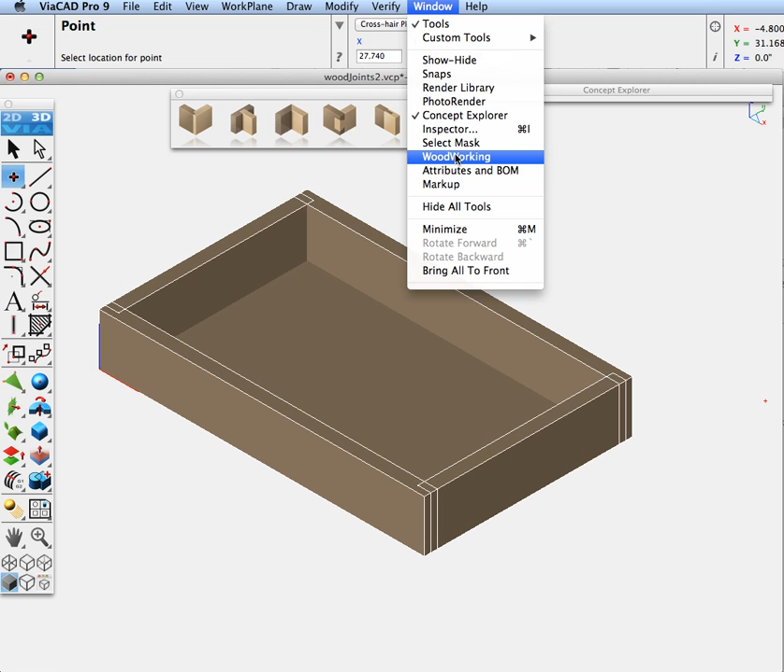The woodworking tools are located under the Window Woodworking tool palette. I've actually gone ahead and created a custom tool palette and dropped the icons to get the 64 by 64-bit larger icons on the screen.

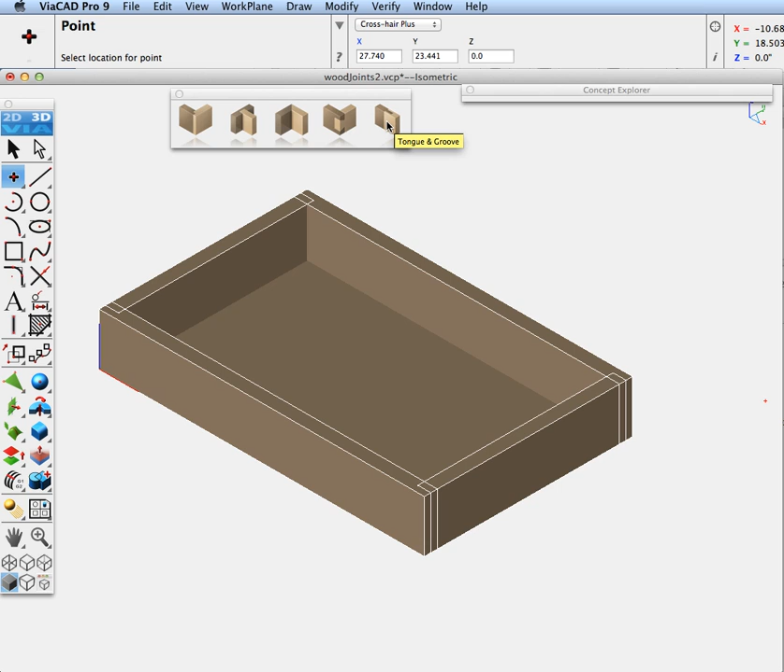The 5 new joints added are Rabbet, Dado, Miter, Dovetail, and a tongue and groove joint. We're going to go ahead and demonstrate each one of these joints.

Let's start off with the Rabbet joint. We have a drawer here on our screen that we're going to cut a couple of joints into, to fit the back piece of the drawer onto the sides. Let's go ahead and hide the bottom, and let's go ahead and hide the front and back of the drawer.

Now let's go ahead and create our Rabbet joint. These are 1 inch thick, so I am going to have the depth of the joint be 1/2 inch and the width be 1 inch.

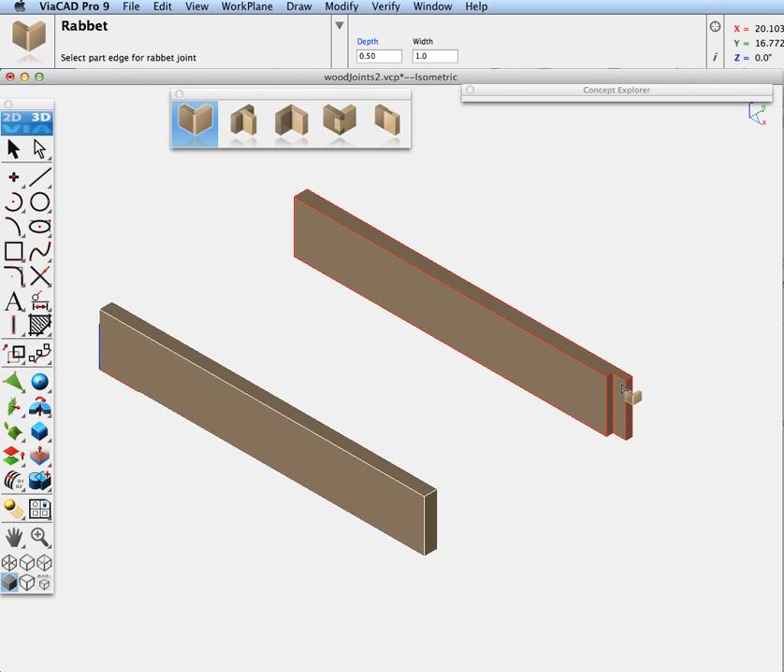I'm going to go ahead and pick the edge that I want the joint to be parallel to, and then I want to pick the face that it lies upon. Let's go ahead and pick the back. Same thing, and then let's pick the other side. Pick the edge and the face. Edge, face. And that's it for our Rabbet joint.

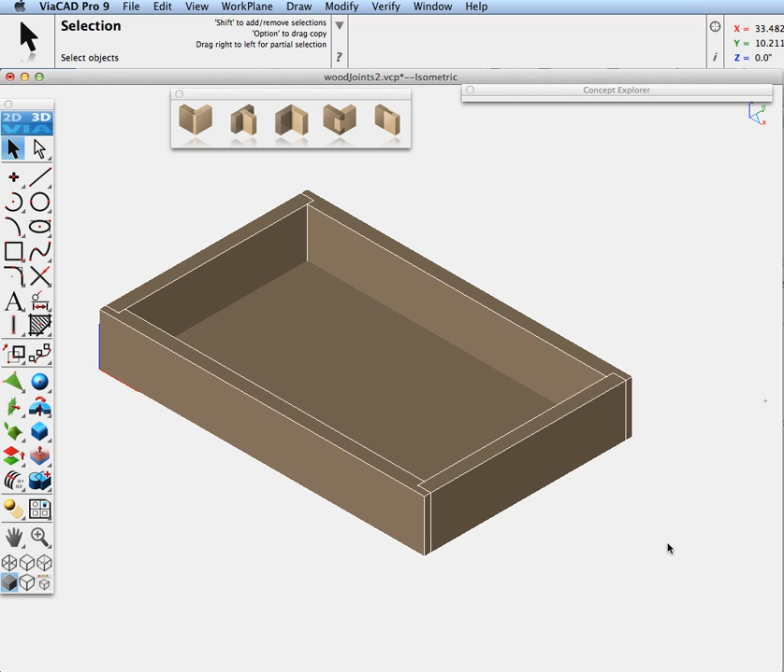Let's go ahead and turn on our two front and backs and see how they fit in there now. Let's do one more thing - let's go ahead and do the bottom.

Let's hide the bottom first of all, and I'm going to rotate it. And let's go ahead and put a Rabbet joint all along the bottom so that plate, the box in the bottom, can fit on it.

And this time, let's see the depth - I have that as a 1/4 inch width bottom, so let's go 0.25. And the sides are 1 inch, so let's have it go halfway through, so let's go 0.5.

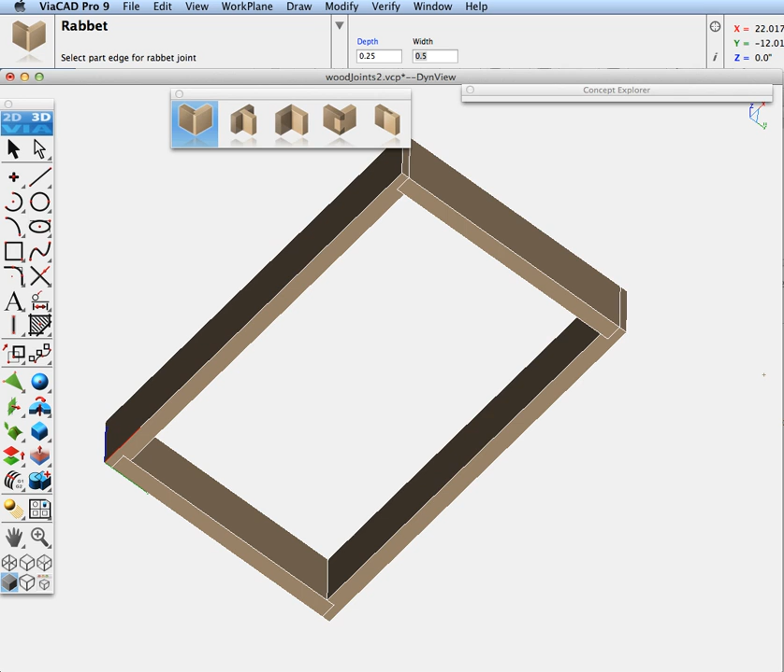Now I'm going to zoom up, and again we'll pick the edge and then pick the face. Edge, face, and then let's zoom down to the bottom, get the other two. Edge, face, edge, face.

Now let's go ahead and turn on the bottom. And so there we have our quick drawer using Rabbet joints.

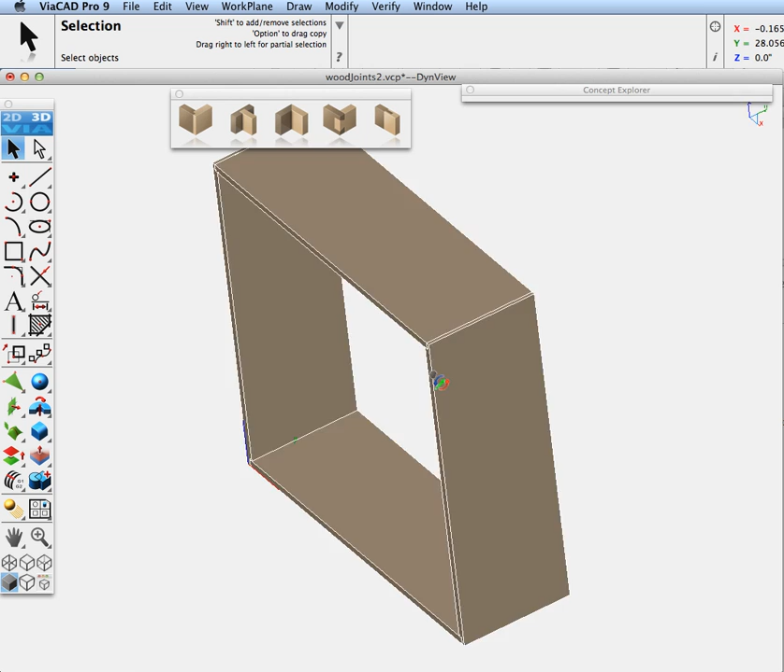Next I'm going to go to Concept Explorer, and I'm going to turn on another model, and this time demonstrate Dado joints. I'm just going to go ahead and isolate my layer, and let's do a zoom extents. What we're going to do is add 2 shelves to this bookcase, and we're going to add those shelves to the bookcase using Dado joints.

Alright, let's turn off the top and turn off the bottom. We have a couple Rabbet joints already on this, so we're going to go to the Dado joint, and we're going to create a through Dado, where this is going to run the whole length of the part. I can also do stopped, blind, and custom Dado joints. Custom is if you want to select a line and have it go at an angle across your wood.

Alright, so let's go ahead and specify the distance from the edge, and I'm going to go 7 inches. And the depth, we're going to go 0.5 inches, that's for 1 inch thick wood. And let's put the width at 1.

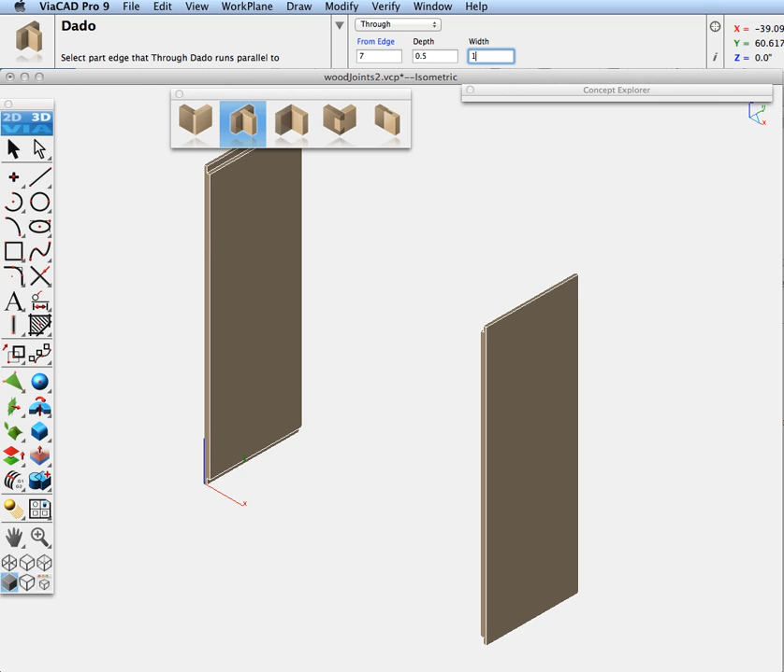Then I'm going to zoom up over here, and I'm going to pick this edge. So we're going to go 7 inches up from this edge, along this face.

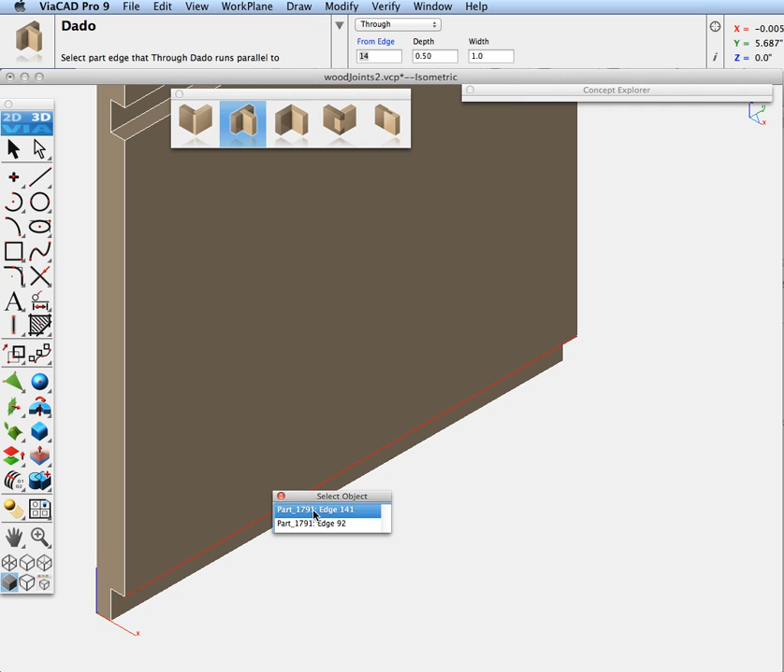Now let's do this again, only this time let's do 14 inches. We'll pick this edge, pick this face, and then we have our 2 Dado joints on that side.

You know what, we've got to do this side as well. So let's pick edge, face - that's 14 inches. Click on this, turn this back to 7, pick the edge, pick the face, and there we have our 2.

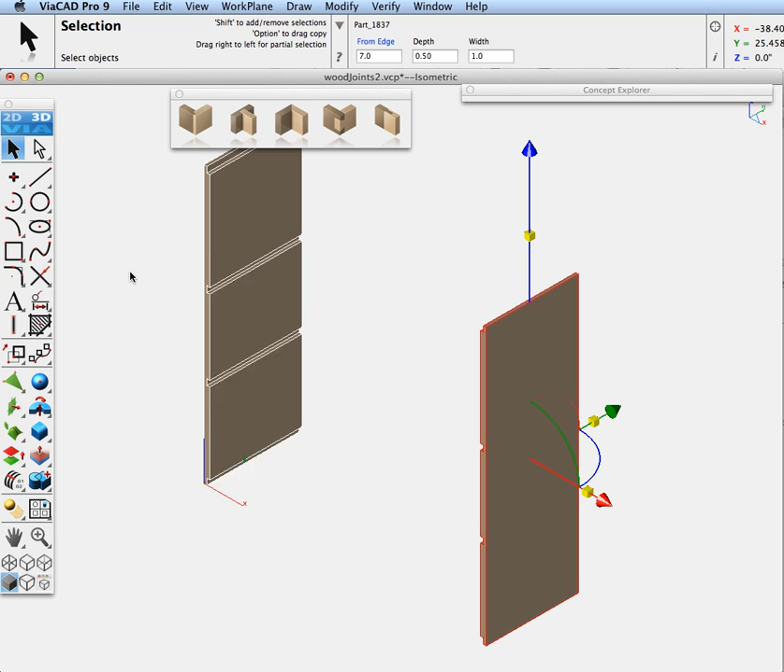Now let's go ahead and turn everything on. I'm going to grab this, and grab that endpoint, hold down my Option key, and let's drag one in over here, hold down the Option key, pull it up, and put it in over there. And there's our real quick bookcase using Dado joints.

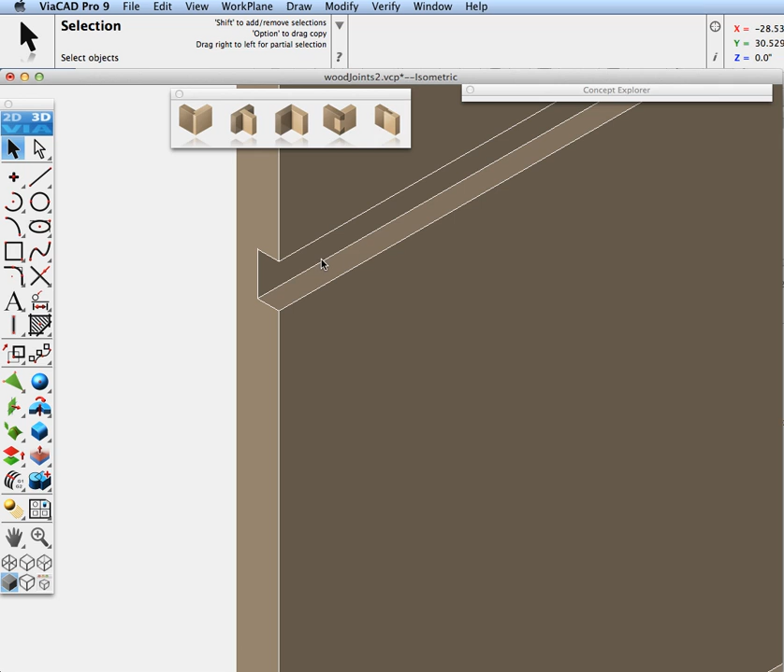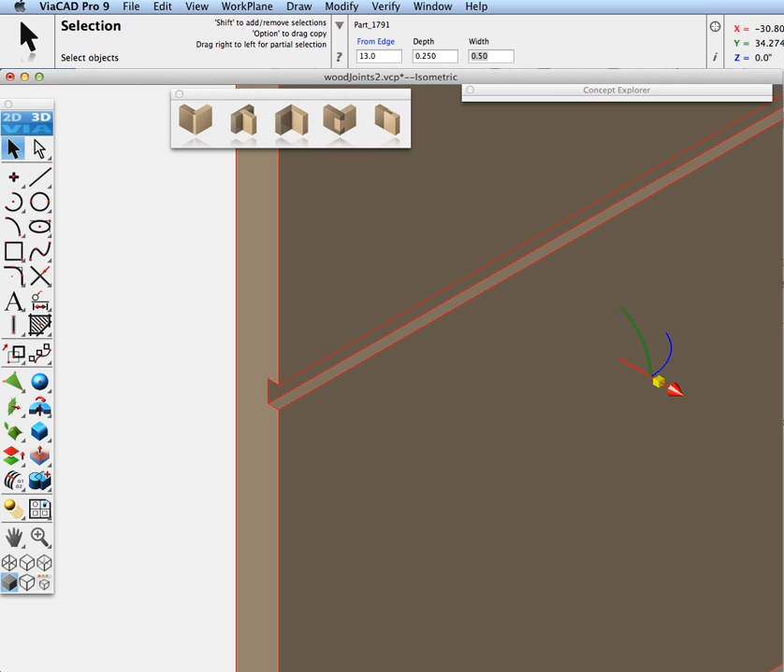Like the mechanical design features, you can also take the wood features and click on a face that was created by the feature, and the data entry window will show you the parameters for it. So let's say I didn't want it at 14 inches, I wanted it at 13 inches. I can type that in, or change the depth to 0.25 or the width to half an inch. After you create your woodworking joint, you can go back, select it, and modify it.

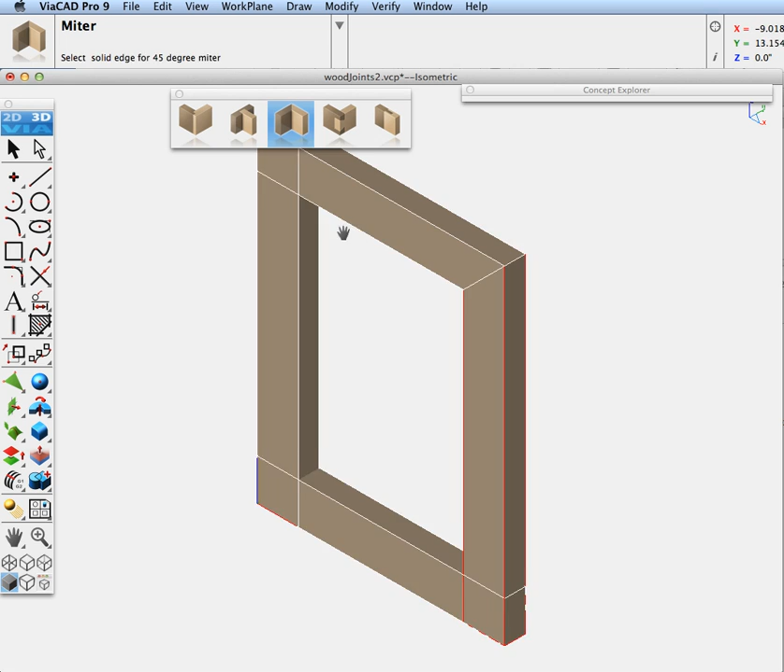The next one we're going to talk about is the miter. Let's go to our layer manager and isolate that layer. Say you have a picture frame and you want to create 45-degree joints on it. So we'll pick this edge, and you can see how that created a 45-degree angle. Then to mate it, we'll put another one on this side, and we'll just run around on those edges to do all of them. And that is our miter joint.

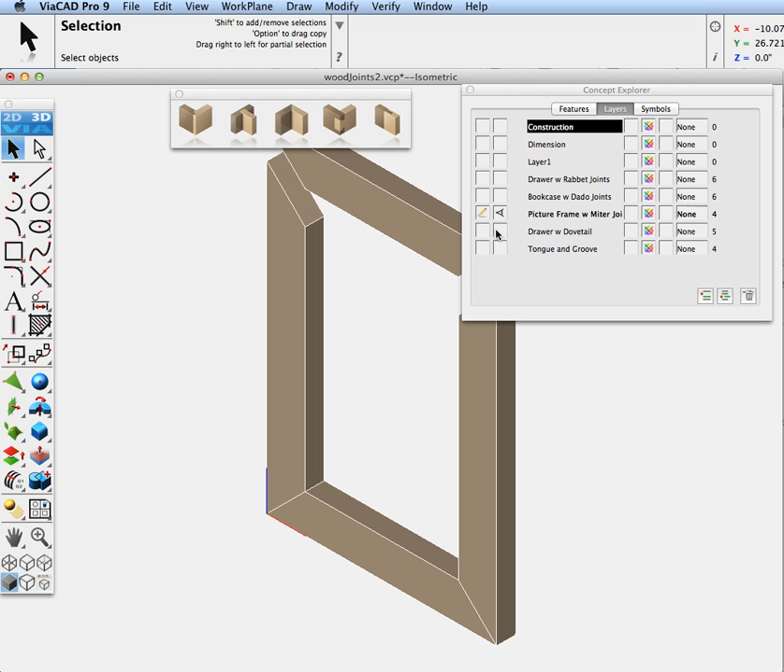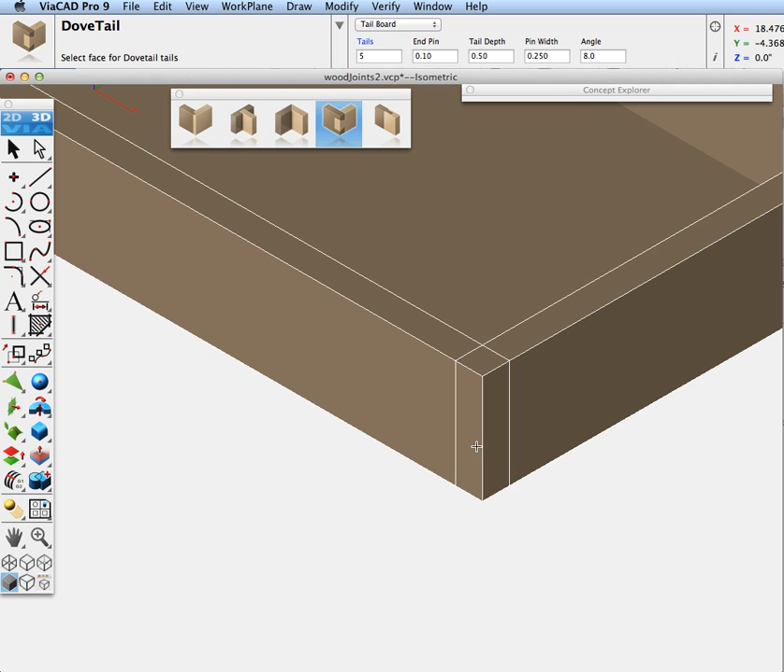Go to Concept Explorer. This time we're going to do a dovetail. Isolate our drawer. With the dovetail, you're going to have a tail board and a pin board, so let's specify our parameters for it. We'll select the face, the end of the piece of stock of wood that we're going to have our tail board on. Let's grab that, pick that face, and apply everything to it. Let's go ahead and make the end pin a quarter inch, a little bit wider.

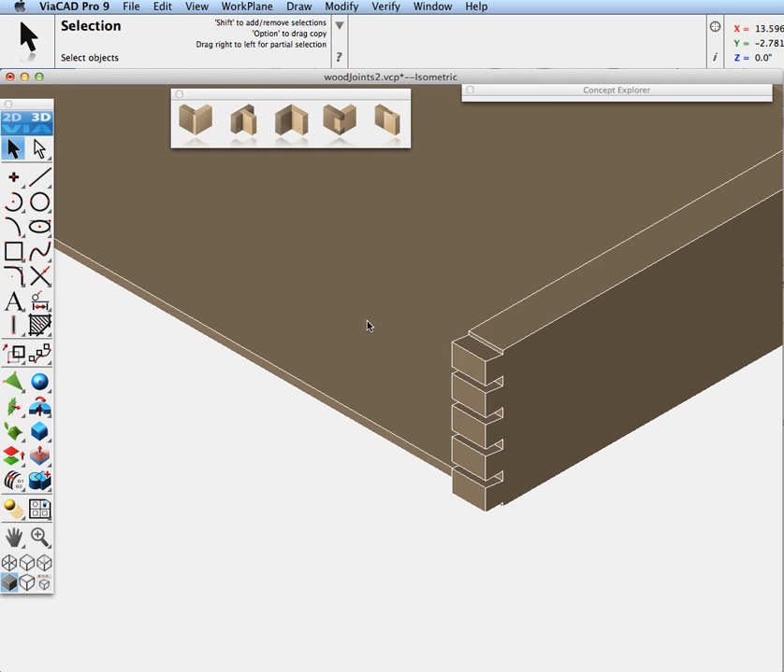Let's turn this off so you can see these a little bit better. Let's do some modifications to it. Change the end pin to 25. There we go. Let's change the angle to 10 degrees.

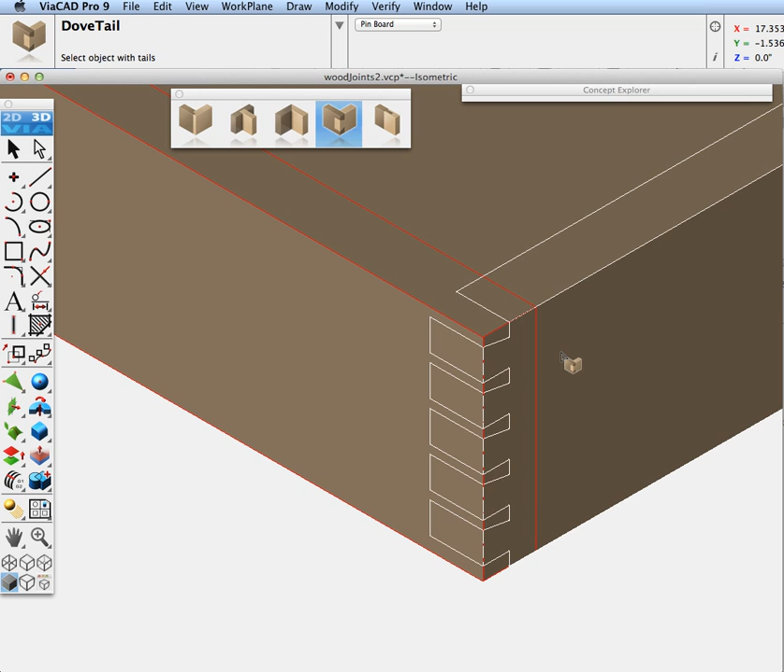Now let's say we get our dovetail parameters where we want them. Let's turn back on this, and make the mating pin board for our dovetail. We'll pick the part that we want to have the pins on, and then pick the tail board. And now you can see we've created our joint in there.

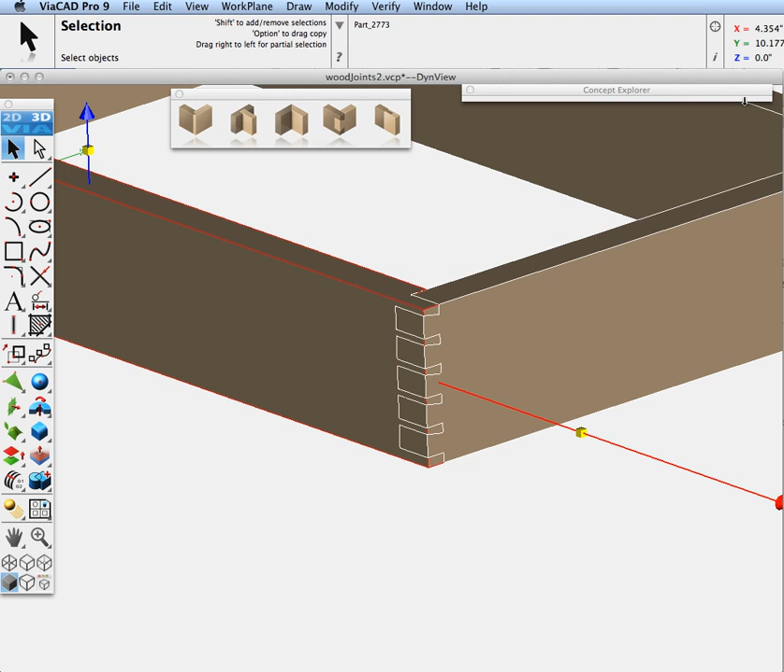Let's pull it out. Let's turn this off so you can see a little better. I can't see my gripper, so I'm going to turn that on and make it always visible. There we go. Let's pull this out. Now you can see our joint.

Let's say we decide to change one of the parameters. Let's click on it and change the number of dovetails to 4, and change the tail pin width to 0.05. So there you can see you can modify both the tails and the pins, and they update with your parameter changes.

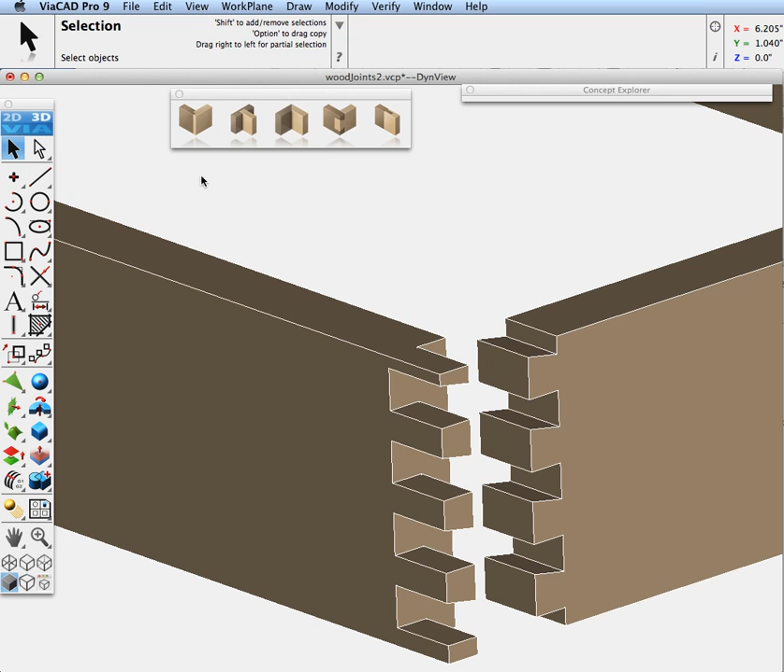The next joint that we're going to talk about is the tongue and groove. We're going to isolate this — let's say we have some floorboards or paneling that we want to have a tongue and groove on. Let's see how you would use the tongue and groove tool to apply this feature. So we're going to put — let's see how wide is this? It's a half inch by 2 inches.

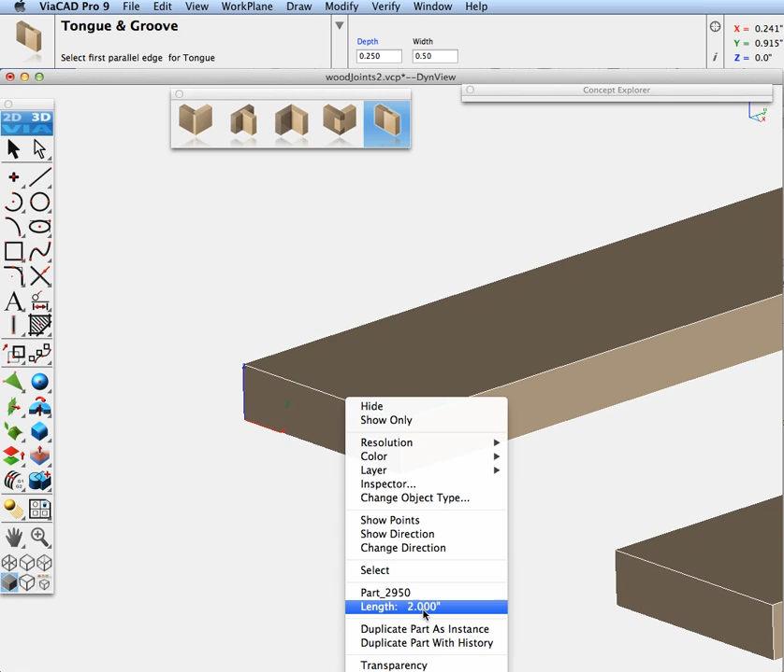So we're going to make this smaller, let's go 0.1. Now what we're going to do is select, and we're going to have it run all the way across the top. And there you can see the cutout and the groove that have been added — the tongue and the groove that's been added.

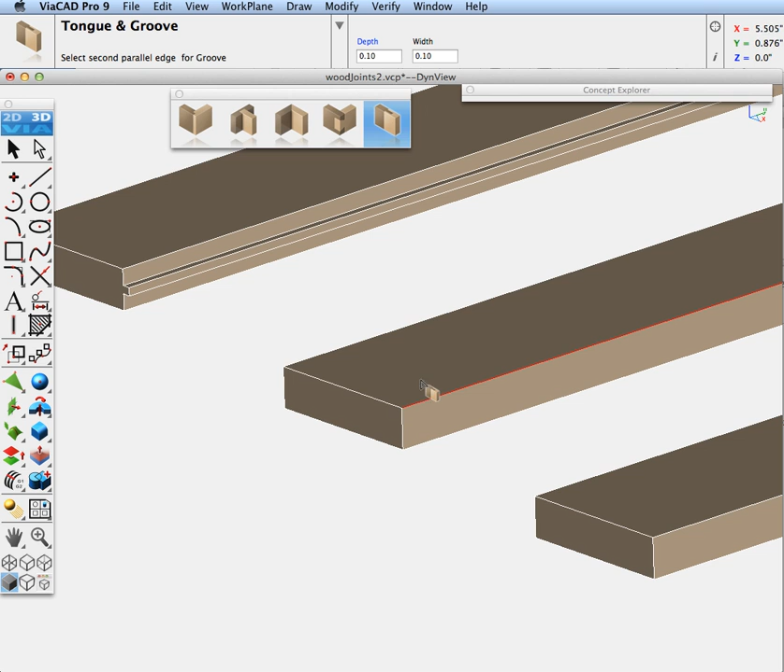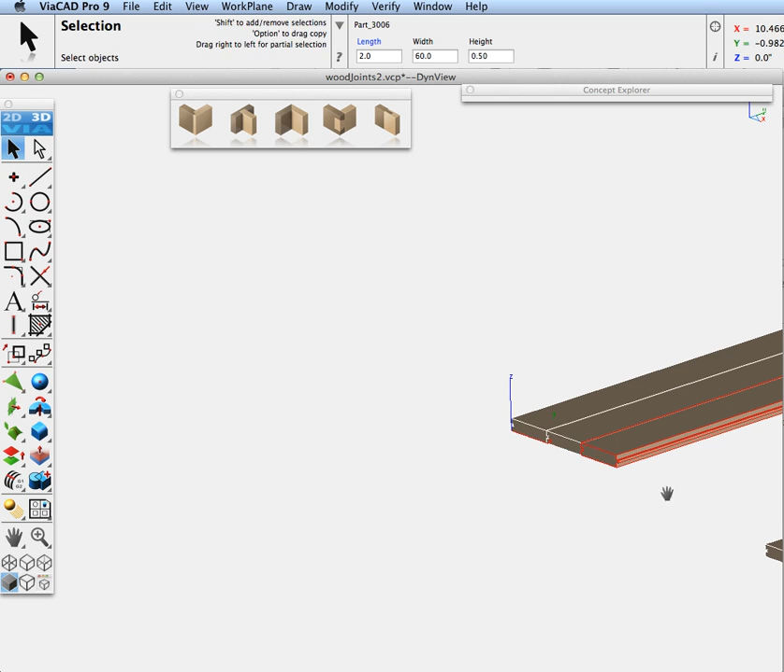Now this was opposite, so let's change the order that we pick these. There we go, let's just pick that same order through here. And let's go ahead and put these together. And so there we have our tongue and groove.